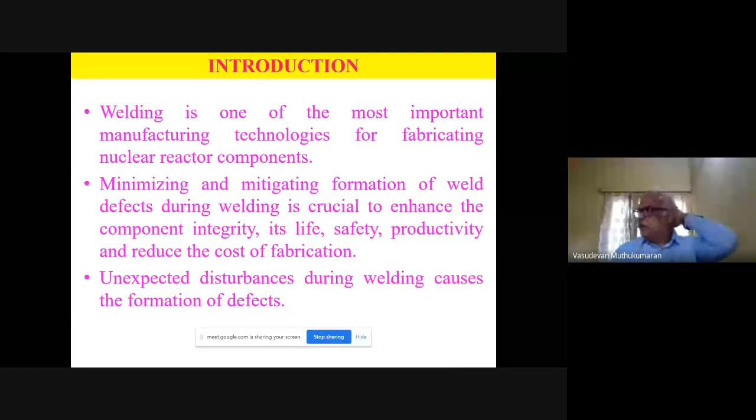In the nuclear field, welding is the most important fabrication process because most of the components in the nuclear industry are fabricated by welding. In the nuclear reactor, the components are very huge and big. Only a few Indian industries are capable of making these components, like L&T and some Walchandnagar industries, and only a few of them we can name. And so it's very difficult, and also a lot of cost is involved in fabricating the nuclear reactor components.

The components fabricated should strictly follow the codes and standards, otherwise you cannot put them into the reactor. So mitigating defects, any distortion, and minimizing residual stresses are very crucial, important factors when fabricating nuclear components by welding. By doing all these things, we can enhance the component integrity, its life, and also safety. Also, we can minimize cost of fabrication and, in turn, increase productivity.

But whatever optimized process parameters you standardize, even after doing mock-ups, when you start fabricating, you end up with defects. This is due to disturbances during welding. It's very difficult to control your welding process, and you always end up with some defects. So here automation plays a critical role. Automating your welding processes can minimize welding defects, reduce post-welding operations, and enhance weld quality.

Based on the degree of automation, we can classify welding processes as mechanized welding, automatic welding, and robotic welding. What is mechanized welding? It is welding in which welding parameters are controlled mechanically or electronically, but manual intervention is allowed during welding. So from manual welding, we moved on to mechanized welding.

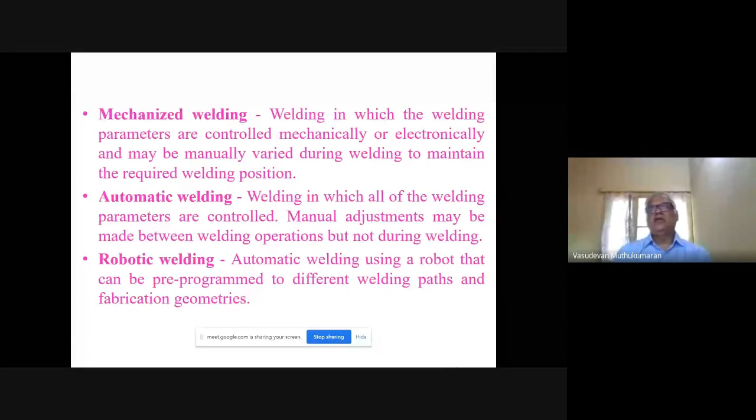This increased productivity, consistent weld quality can be achieved, and we can predict the production rates so that we can have other things in place to minimize cost. A lot of variables can be controlled at a time, and we can get the component fabricated with good quality.

However, there are a lot of limitations also. Automating the welding process requires a lot of capital investment, and we need sensing and controlling devices, accurate part location and orientation, and process planning when you go for robotic or automatic welding. These are the limitations.

Even then, we have a lot of advantages. We can manage the limitations, and still we can benefit a lot by going for robotic or automatic welding in nuclear component fabrication. So we will see one by one.

This is whatever we have done in our laboratory research. I am going to present most of the results from our laboratory research. Of course, towards the end, I will talk about some welding applications at the Nuclear Fuel Complex also.

So we started with the TIG welding system. Around 2001, we were doing only manual welding. Then we wanted to go for the automated TIG welding system. We approached some industry, Prime Automation in Chennai, and got a system which is shown on your screen.

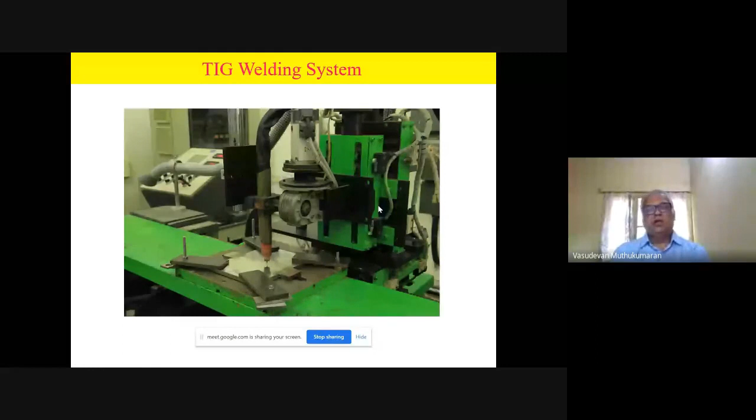Then what we did - one of my colleagues is an electronics engineer who knows machine programming. He discarded this entire controller that you see here, and computerized the entire operation, putting in arc ignition, arc extinction, and we started controlling the power source from the PC.

We then developed this computerized welding system that could carry on a lot of welding. Since 2006, we have been using the system very successfully to develop the A-TIG welding technology for TIG welding of stainless steels and ferritic steels. I will show you some of the results.

We could also integrate an IR camera. You can see here in real time we could capture the full images and process images, and I will be talking about this in the coming slides.

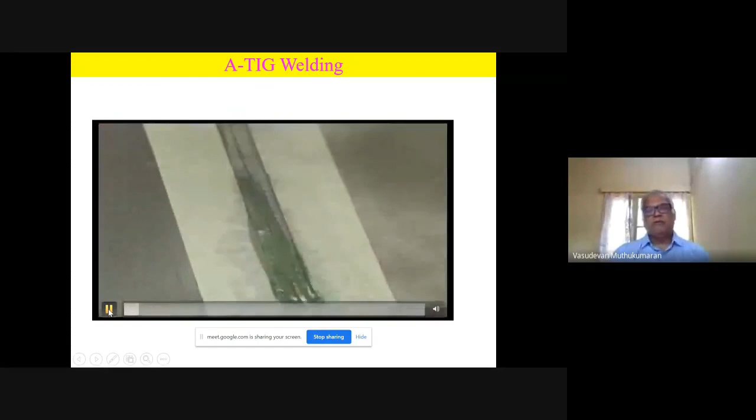So I am going to show you the A-TIG welding technology. I am going to play the video now. Please see the video - here we apply a thin coating of flux on the joint area. It enhances the process performance by multi-fold.

In autogenous welding, we normally cannot get more than 3 mm penetration, but by applying a coating of flux to enhance the penetration, in a single pass we could get 12 mm of penetration in stainless steels. So we can apply single pass and it comes out clean.

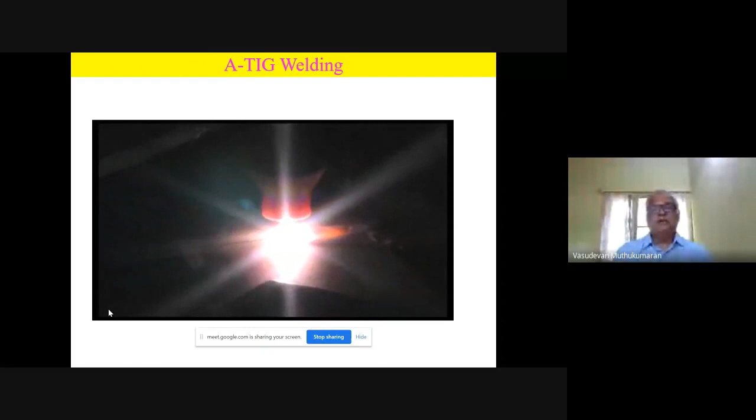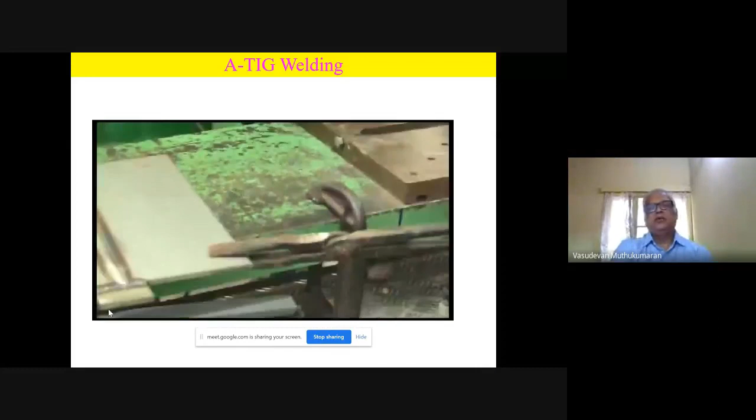Since then we have been using this process for welding various thickness components, even plates. You can see the top side and the back side of the plate here. This pass also achieves radiographic quality.

So in a single pass, we could do large thickness welding. You can see on screen cross sections of 304L and 316L from single pass welding. In comparison, on the right side you can see multi-pass, where we needed some 11 passes, whereas here in single pass we could do 8 mm thick welding.

The bottom one is 12 mm thick 316L. On the right side, multi-pass required 13 passes, which we achieved in a single pass here. The properties are very good, so we were very happy and that's why we got this process approved.

Internationally, TWI has also developed this process. They demonstrated double-sided welding of 20 mm thick material. We tried the same thing here and could also achieve 20 mm using the same system I described. Because of automation and computerization, we could make defect-free welds and achieve 20 mm double-sided welding in stainless steels, on par with international standards.

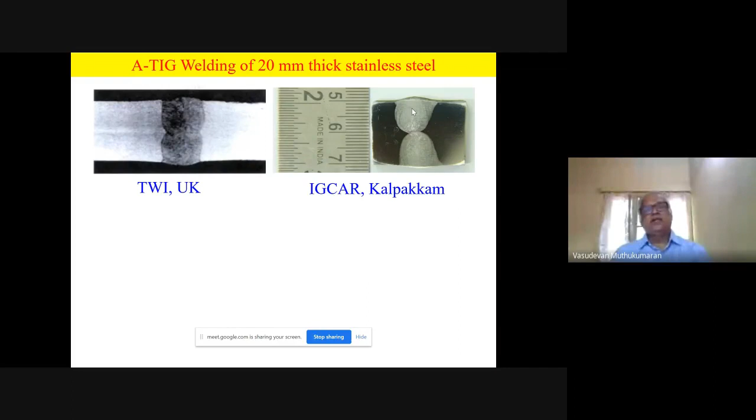Coming to new components - this was in our center workshop. This hexcan component is used as a core sub-assembly. They were welding it by manual TIG before we introduced this A-TIG process, and they had a lot of problems associated with residual stresses and distortion.

We could reduce heat input, reducing residual stresses and distortion. We have successfully fabricated these components and have been using this in our core testing facilities for the last 10 years.

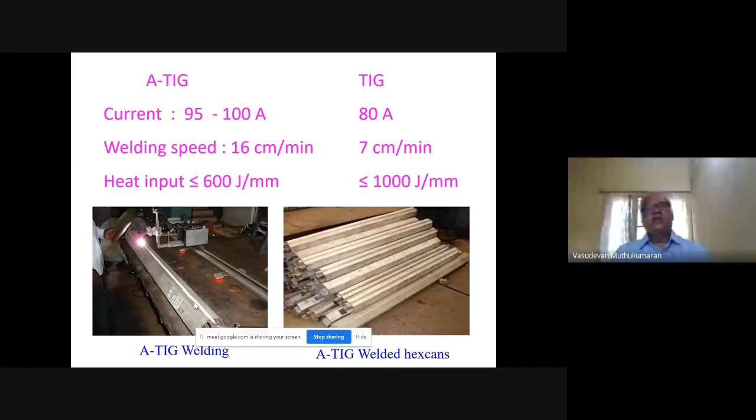Then we went on to do pipe welding. This is again 4 to 5 mm thickness pipe welding. You can see we are seam welding the top side and root side with full penetration. These are the jobs used, and we use a lathe to rotate the pipe. You can see the pipe welding here and the seam on the pipe.

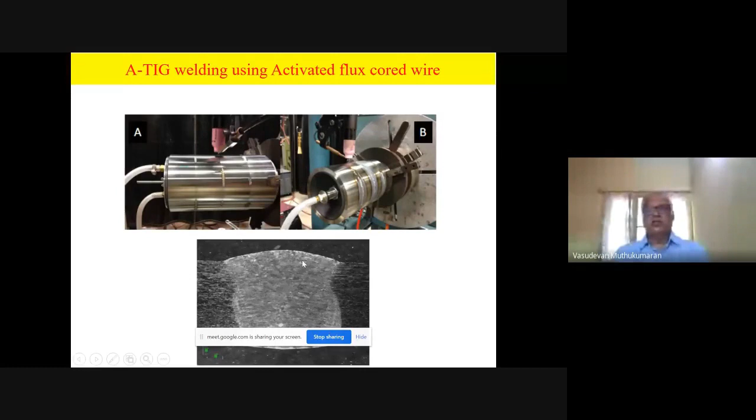So A-TIG welding has been a great success for us in fabricating various components.

Moving on, the next component I'll talk about is the fuel subassembly. This is a core component used inside the fuel subassembly where you pack all the fuel pins. You can see the rods; the fuel pins are located inside, and this outer hexcan is made of D9, another titanium modified stainless steel, while the foot area is made of 316L. So these parts - the hexcan part, center core part, and the bottom foot assembly - have to be welded together.

They use this welding facility in our center, applying TIG welding. Now it's again an automated process, done in the 2G position. You can see here the welding is done, the foot assembly with hexcan, and this requires 2 or 3 passes to finish the welding.

So many fuel subassemblies will be loaded into the reactor - around more than 1,700 numbers are required to start the reactor initially, including fuel, blanket, and reflector subassemblies. So many welding operations are involved in this, which is why we again suggested ATIG welding.

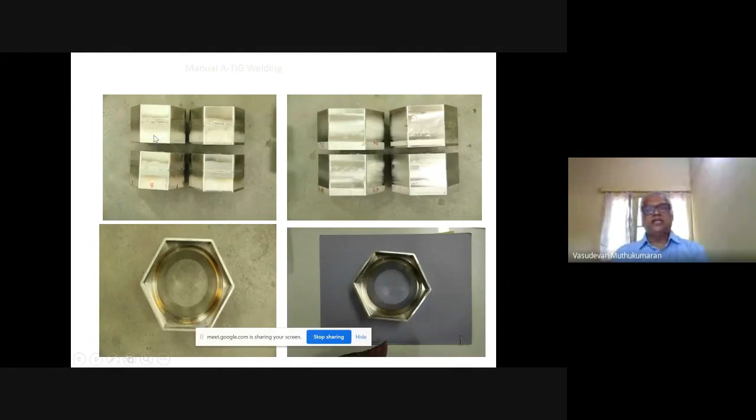On mock-up samples, we demonstrated single pass welding and were successful in reducing heat input and distortion again. It also passed all quality checks. You can see full penetration achieved in a single pass here with ATIG welding.

So the ATIG welding technology developed in the lab has now been transferred to industry. In our central workshop it's used for welding various components, pipes like PFBR fuel subassemblies, pipe welding, various plates, and successfully so. The automation of the process really helped in achieving our requirements.

Moving on to the next one, which is also a variant of the TIG welding process, called narrow gap welding. This is mainly used for welding larger or higher thickness components. The minimum thickness we work with is 25 mm and beyond.

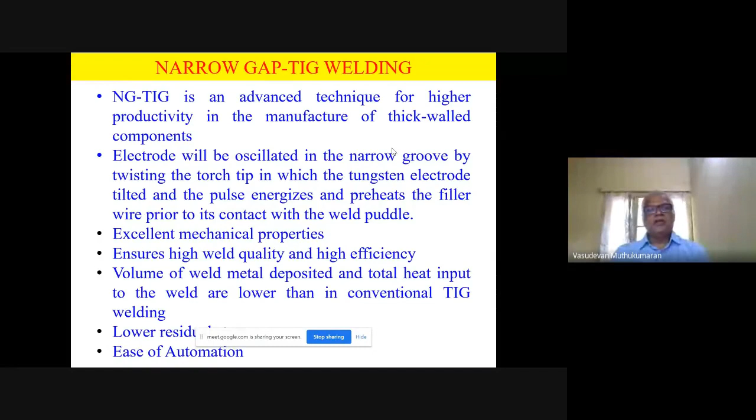This is a fully automated process, and you can see the machine here, housed in our central workshop facility. This is the torch, and we have a small camera here to visualize the welding pass. You can see here a typical narrow gap weld joint cross section.

Down here you can see the conventional V-groove joint. There's a lot of difference - the number of passes required is less, residual distortion is reduced, and the weld metal consumed is less when you shift from conventional V-groove to narrow gap TIG welding.

So we could do this from 40 mm thick to more than 100 mm. Now we are working on an 800 mm diameter component also for AUSC applications, using this narrow gap technology. You can see some of the things we have welded.

You can see here, it's a hot wire based process, because the wire is also heated up just prior to welding. You can see the pipe, 40 mm thick, 304 stainless steel pipe.

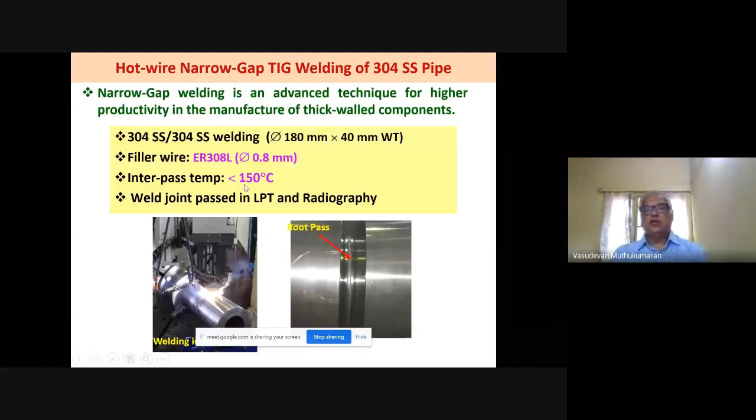Using a 308L filler wire, 0.8 mm dia filler wire was used. We maintain interpass temperature of 140 to 150 degrees centigrade. You can see the root pass done. We have completed the welding. You can see the final pass also here. After completing this pass, we did liquid penetrant testing.

Then 40 mm thick plate also we could weld. So all the pipes and tubes, I mean all wall thickness tubes and plates also, we used it. It's a fully automated process. We were successful in welding various components.

Coming to orbital TIG welding, here we are using this process mainly for AUSC components like 617M and 304H copper boiler tubes. We are using pulse current because there are different quadrants. The torches move through 360 degrees, and we are varying the current from quadrant to quadrant. We adjust the current to get full penetration and a defect-free joint.

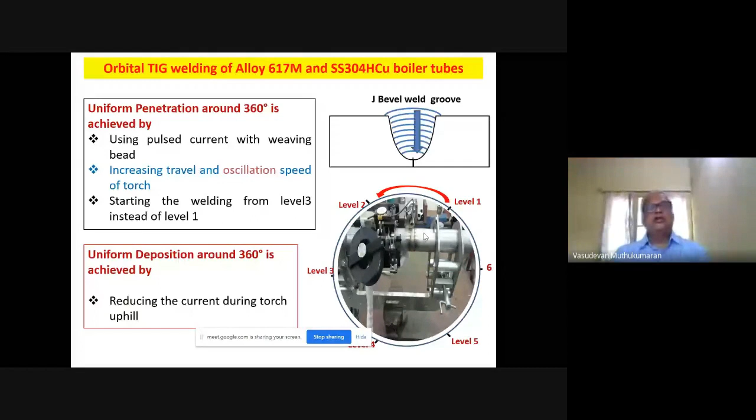You can see here a welded component. We got a root side uniform penetration. Cross section you can see. The wall thickness was 11.9 mm. Tube body was 52 mm. It required around 11 passes. The fabricated tube qualified radiography and liquid penetrant testing. See the cross sections here.

Then again we use the same system for orbital TIG welding of 304L pipes. We are successful in using our orbital TIG welding. Here the torch moves around on the track to weld these. This wall thickness is 6.35 mm, OD is 219 mm, material is 304 stainless steel.

So we could use all this orbital TIG. It's also an automated process. We could control everything and fabricate successfully defect-free components. Only thing is you have to optimize the process parameters, because sector-wise, after you cross the second quadrant going into the third, heat build-up aids the penetration in the third and fourth quadrant. So you have to reduce the current levels when you go to the third and fourth quadrant to get full penetration and avoid melt-through, things like that. So again, we successfully used this process for welding these components.

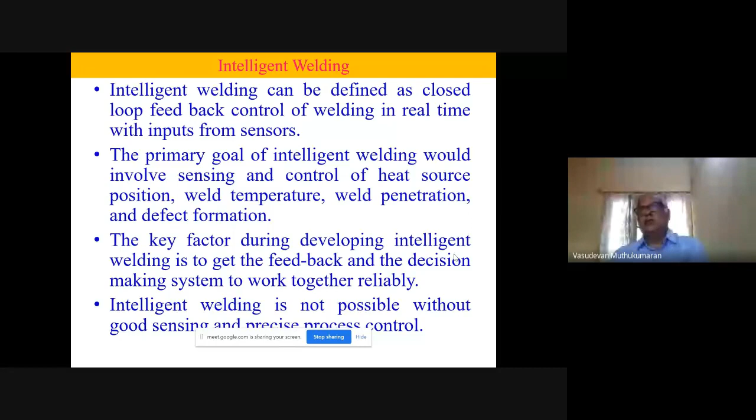Next, we have been working on developing a technology called intelligent welding. We require this mainly because in reactor components, when in service, there are failures in the weld, some defects develop in the weld. We want to carry out repair, because once a reactor is in operation, it has radioactivity and human access is difficult. We have to carry out the repair welding remotely. So we wanted to develop this technology. We started working on it and have made a lot of progress. I'm going to share some of the results.

Intelligent welding is nothing but a closed loop feedback control of welding in real time, employing suitable sensors. We need to sense the torch movement and also control the heat source parameters in real time. We need to control the weld temperature so that we get the required depth of penetration, and the repair welded joint is defect free. So here the main key factor is feedback and decision making working together. The feedback system and the control algorithm have to work together reliably. Without good sensing and precise control, it is not possible, so we have to choose suitable sensors.

We initially tried infrared sensing, an infrared camera, because it measures the temperature during welding. It's basically a thermal imaging method. We thought that should work, but the only problem we faced was the cost and life of the infrared camera. We could still get good results, but now we are moving away from infrared cameras to CMOS cameras, which are cheap and very small in size, and can be used in remote locations.

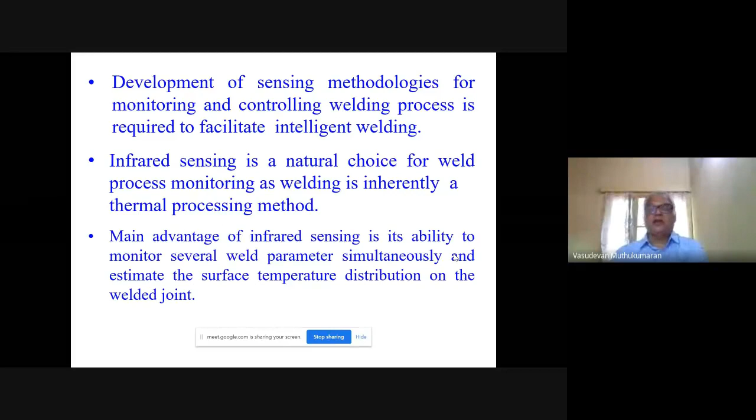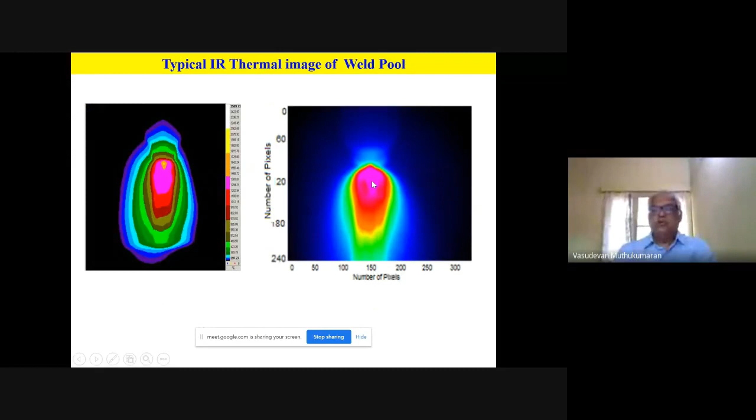You could see these are the typical thermal images we captured. This is after image processing, the typical weld pool image with temperature isotherms. We used feature extraction techniques and image detection techniques to get features like the length and width of the weld pool, and the first derivative from the temperature profile curves to correlate with the depth, weld width, and depth of penetration. For depth of penetration, we use the area under the thermal profile to correlate with the depth of penetration.

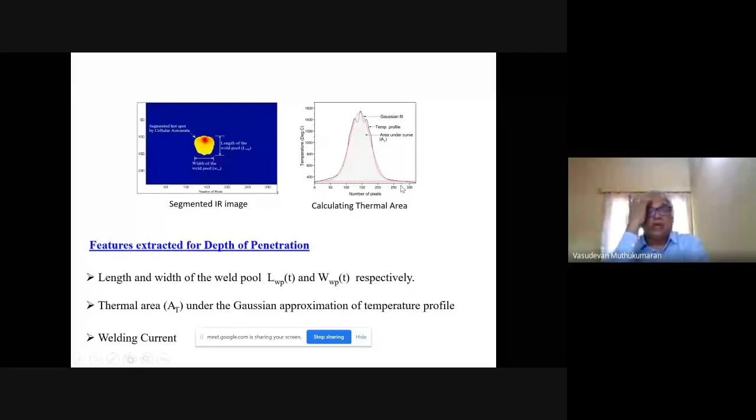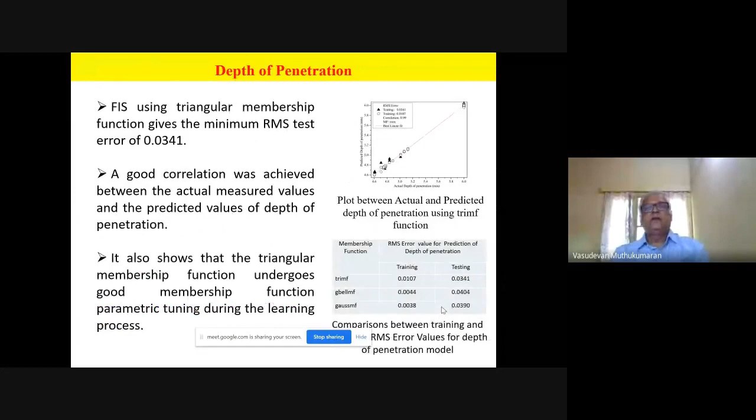RMS values of very low value could be achieved for predicting depth of penetration as well as weld width. So the intelligent welding strategy we propose to adopt is to use a non-contact sensor. It can be a CCD camera, CMOS camera, or a combination of a DIC camera and IR camera for monitoring the weld. Then we need to develop knowledge base on signatures of weld defects.

I will show you some of the signatures we captured using an IR camera. Temperature field can be measured and correlated with weld defects and weld dimensions. Using a DIC camera, we can use strain measurement correlated with residual stress, distortion, or cracks like defects. The weld surface profile captured with this camera can be correlated with bead shape and penetration. So first we have to develop a database, a knowledge base on the various defects and weld dimensions correlated with image profiles.

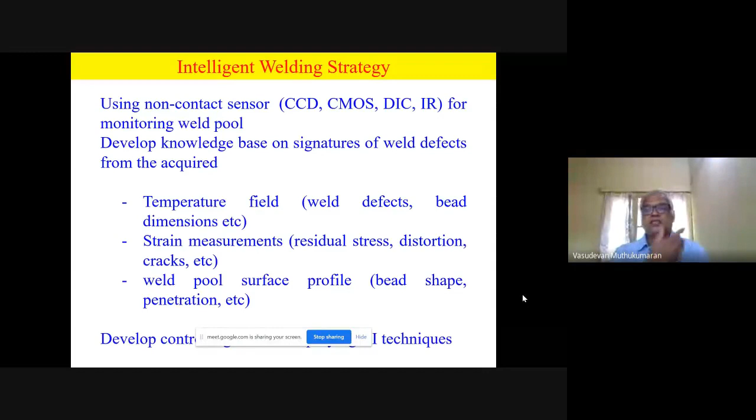We can see some of the image signatures captured using the IR camera. You can see this entire weld length, where we measured the temperature. We can see that it's almost flat, which shows a complete penetration. This is the backside. When you get a complete penetration, there is no change in the temperature.

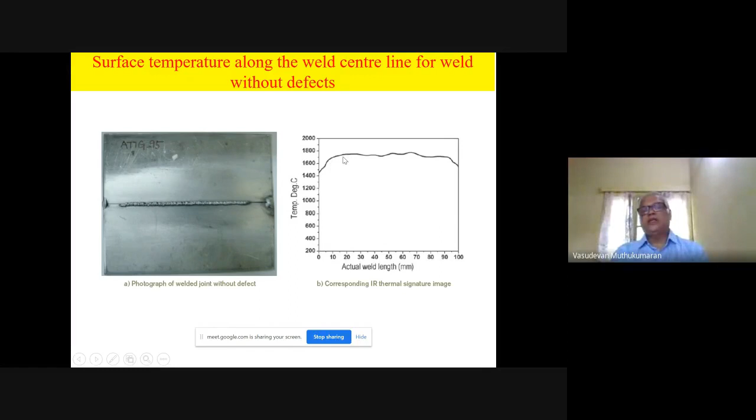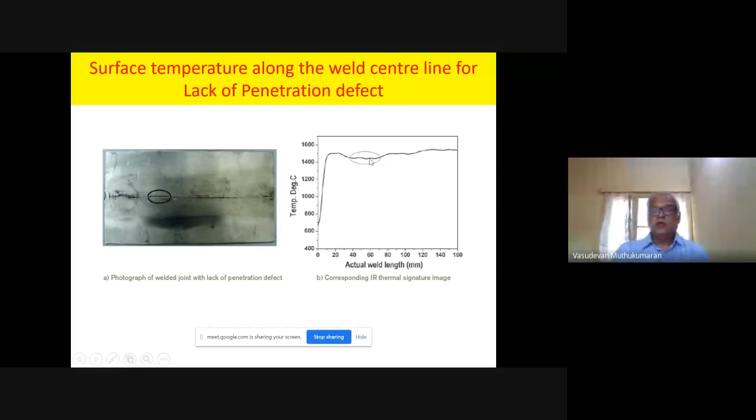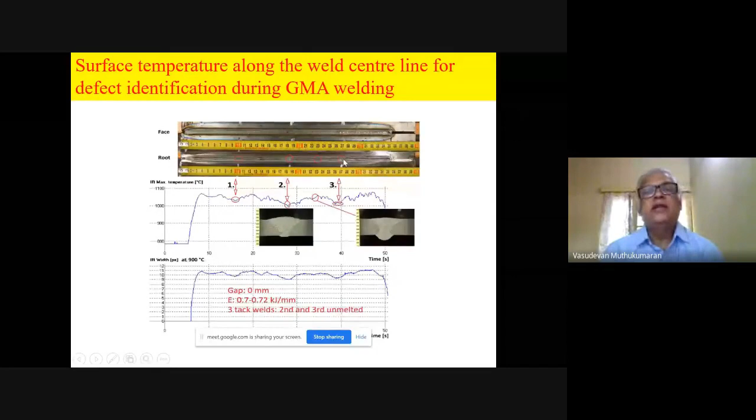So these are the strategies we would like to adopt during intelligent welding. Here in GMA welding you can see again the temperature is recorded. There are some dips in temperature associated with defects like lack of fusion, lack of penetration, and so on. This is in GMA welding, again highlighting the defects.

You can see the defects marked in the weld sample, and correspondingly in the temperature curve you can see various defects. So these are the things we record. We use the surface profile, which can be captured using any vision camera, for calculating the depth of penetration.

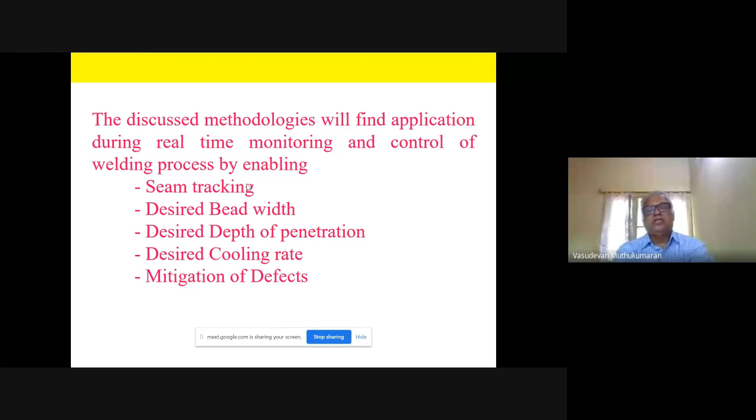What we want to do using this intelligent welding strategy is adopt it in real time for monitoring and control of the welding process, mainly the TIG welding process. This can be extended to laser welding as well, enabling seam tracking to achieve the desired bead width, desired depth of penetration, desired cooling rate, and to mitigate defects in the weld.

So this is the strategy we want to adopt for developing remote welding technology for our reactor components, and we are almost there now.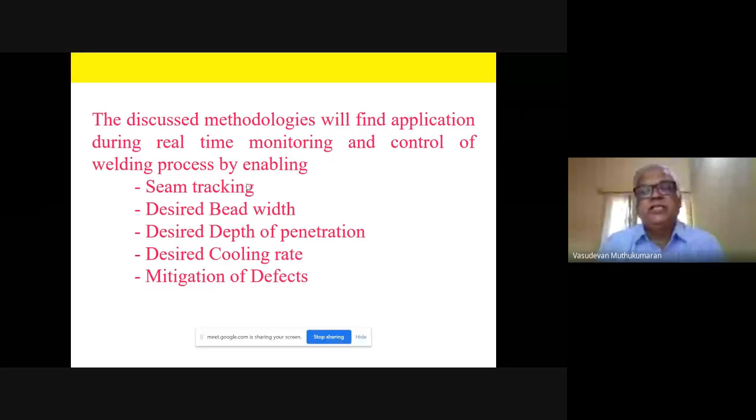Hello? Hello? Sir, what's the problem?

You can see here, this is the hot wire feed here, this is the TIG torch, the CMOS camera is positioned, and the laser seam tracker. We could use these technologies, as you can see in a close-up look, the CMOS camera and then the seam tracker.

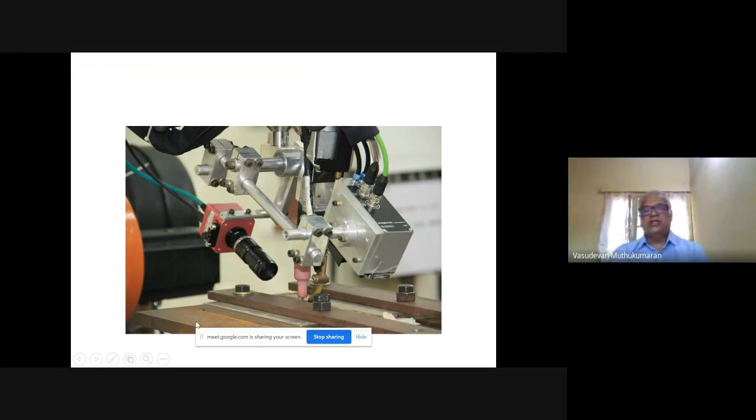This is the joint ready for welding, the clamp, and this is the positioner table. You can see here welded plates. Using only the positioner, you can see carbon steel plates of this much dimension, 560 by 300 by 12 millimeters thick.

This is our top side, and this is the back side. We passed radiography. We could successfully weld because it is an automated process with seam tracking and everything pre-programmed. We could do it very fast, defect free, and we could do it at 2G position, 3G position, and 4G position as well.

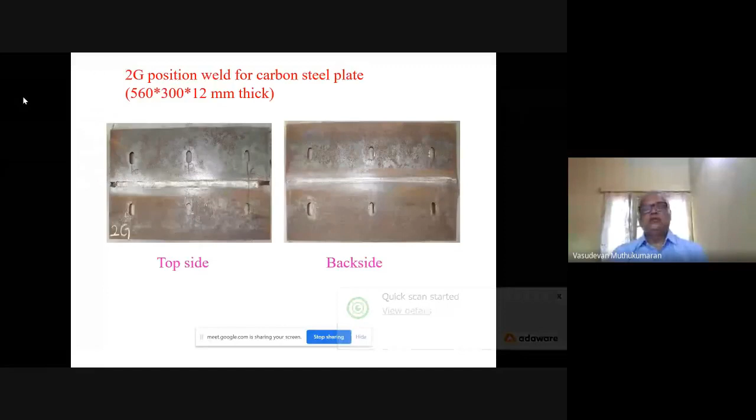All we could do successfully, defect free, not only on carbon steel, but also on stainless steel. This is an 11mm thick plate. You can see the top side, root side, and the cross section. It required some 9 passes to complete the joint, and we could successfully pass radiography again. So we could use the robotic automatic welding system to get good quality weld joints. Now we are evaluating their mechanical properties, residual stresses, and things like that.

The system we are finding very useful. Now with the same robotic welding system we are also using for pipe welding. Pipe welding also can be used, but I don't have any slide here, so I cannot show that.

Main purpose here is we want to use this system to investigate remote monitoring of the TIG welding process, comparing our systems with what is available at Oak Ridge National Lab USA and TWI UK.

Whereas in our case, you can see the camera we have is only 60 dB dynamic range of brightness. With the arc, the arc effect is still seen in the images during TIG welding and even multipass welding - you can see the grooves. So what is the camera we have? It's a 60 dB dynamic range of brightness. We need to use 120 dB cameras to nullify the arc effect.

Then only will the arc be totally not seen, and we can precisely use the weld pool for image processing and further development of control algorithms to control depth of penetration and bead width. The same technology can be extended to additive manufacturing as well. In additive manufacturing, you need to control the bead width and bead height. We can use similar cameras for that, extending this to processes like wire arc additive manufacturing.

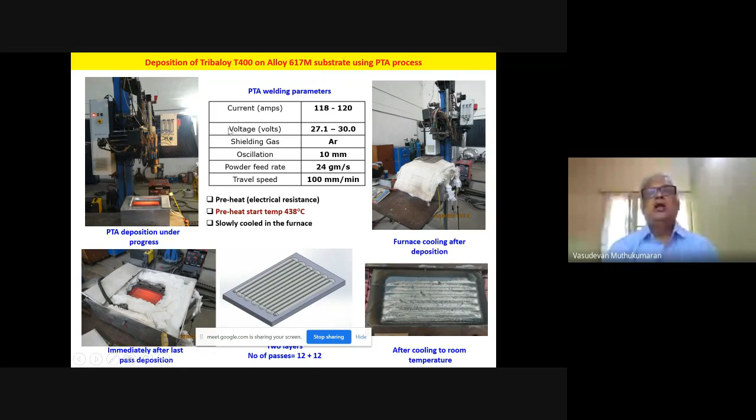We are developing technologies for that. You can see it's a PTAW process in our central workshop - this machine is the plasma transferred arc welding process, where overlaying is being done. Here the material, Tribaloy T400, is deposited on alloy 617. These are the parameters used. It needs to be preheated by electrical resistance and then slowly cooled in the furnace - you can see it's furnace cooling after deposition. You can see the deposited substrate, and this is the hardfacing coating.

We could successfully demonstrate that. This is how the plasma transferred arc process works. This is your tungsten electrode, and you can see the inner nozzle and outer nozzle. The outer nozzle has shielding gas, the inner nozzle has plasma gas, and powder is also fed through this. Through the nozzle, when the arc comes, it gets constricted - that's how it gets a penetrating power arc, and the process performance is enhanced.

You can see the hardfacing deposit laid on the substrate material here. This is the process principle.

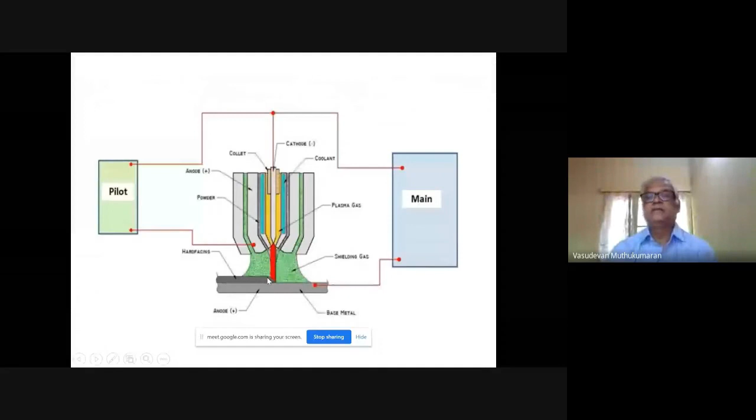We could do this again for PFBR applications. The diverse safety rods use a dashpot piston that requires hardfacing. The material is modified 9Cr-1Mo steel, and we use a nickel-based hardfacing alloy - commercial Deloro 50 - for depositing on this modified 9Cr-1Mo.

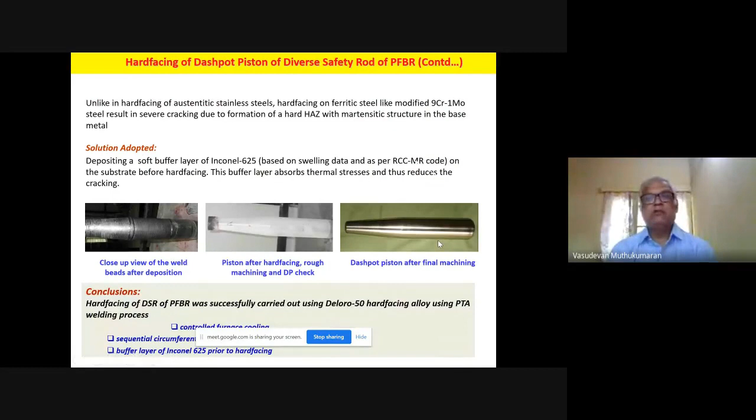We could successfully develop the technology. You can see here, this is after hardfacing, and this is dye penetrant testing after machining. So we could successfully develop the technology for hardfacing of this diverse safety rod of PFBR. It is now used in PFBR. So this is about PTAW.

Again, because of automation, we could achieve this. Before automation, we worked with OnePlus Systems in Chennai to develop this technology. Initially, even for sleeves in the grid plate, they helped us through automation. If we tried with manual methods, we used to get a lot of defects. After automation, we could make almost defect-free hardface deposits. So automation really helped in achieving our quality.

Coming to the next one - for hardfacing, so far we have been using the PTAW process. Now we want to try a low heating process called CMT, a process developed by Fronius.

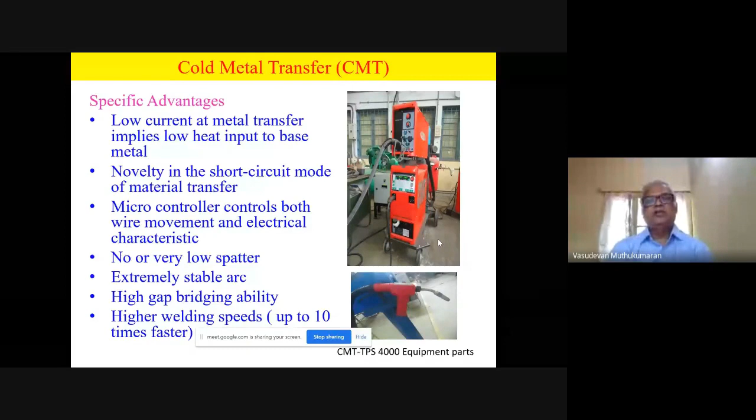This is a low heating process, let's see how it works. You can see this is a mechanism, and here's what happens during this process.

During MIG welding, an arc is struck between the filler wire and the material. Once the arc is initiated, the filler wire is moved to touch the weld pool. When the wire touches the weld pool, the arc is extinguished and the current is reduced simultaneously. Then the wire is withdrawn, and the weld droplet detaches from the filler wire and falls onto the workpiece to be joined. Then the arc is reinitiated.

There is a hot and cold period alternating. It happens very fast, so productivity is not lost, and we get a low heat input, allowing us to avoid spatter. This is useful for hard facing and cladding applications.

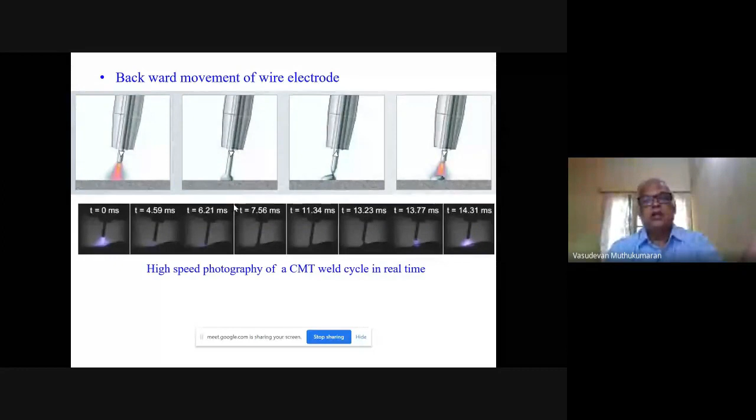We successfully deposited, and now we are characterizing all the deposited layers. Since this is a robotic process, we could control all the parameters, and we are able to get defect-free hard face deposits.

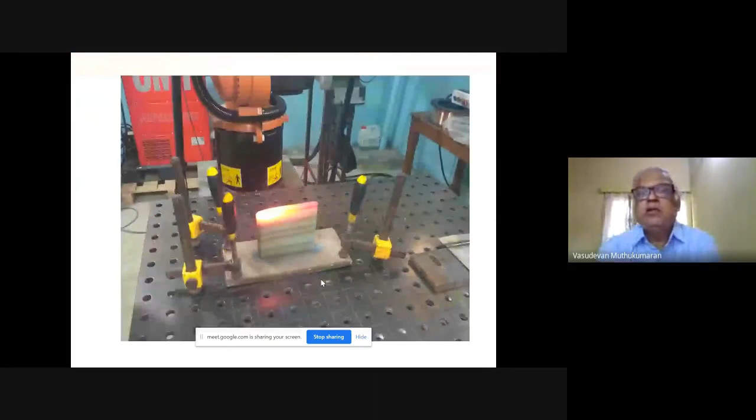Moving on to laser welding - especially we use laser welding for end-cap welding. In end-cap welding, there is a fuel element inside loaded with uranium oxide pellets. Then on the sides of the tube, we need to weld plugs.

Earlier we were using TIG welding, but we have now moved on to pulse laser welding. You can see in the lab we developed this technology - this is a CNC controlled laser welding system. You can see the controller, and this is the laser welding system.

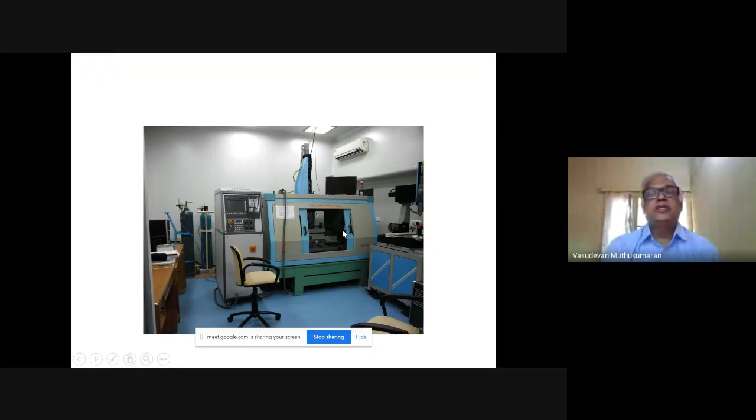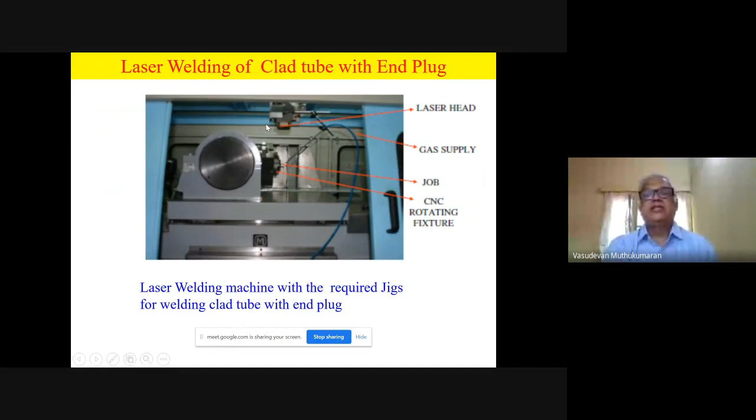This is pulsed laser welding with peak power control. You can see the actual welding - the component, the tube, is held here in a rotating chuck. This is the laser gun, and you can see the inside views shown here.

We could successfully weld - you can see P91 tubes can also be welded, as well as clad tubes. These are the joints welded - this is a clad tube and this is the end plug, successfully welded. You can see the welded clad tubes here, and this is the waveform of the current.

These are the parameters we used and measured. You can see the penetration is complete with a good weld profile. So we successfully optimized the process parameters for end-plug welding of fuel pins, for both stainless steel and modified 9Cr-1Mo steel.

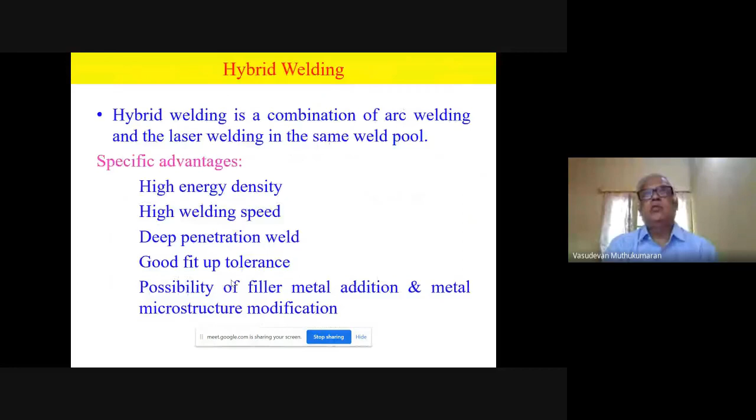Then, since the pulse laser system penetration is limited to only 500 watts, we integrated a TIG torch. We specially designed fixtures to attach and integrate the TIG torch with the laser gun, and we were successful. When you couple a TIG torch with the laser welding system, there is significant improvement in depth of penetration at higher speed.

We can also still avoid defects associated with the laser welding process, because we are combining two heat sources - laser and arc welding. Defects like porosity can be avoided, penetration can be increased, and defect-free joints can be fabricated.

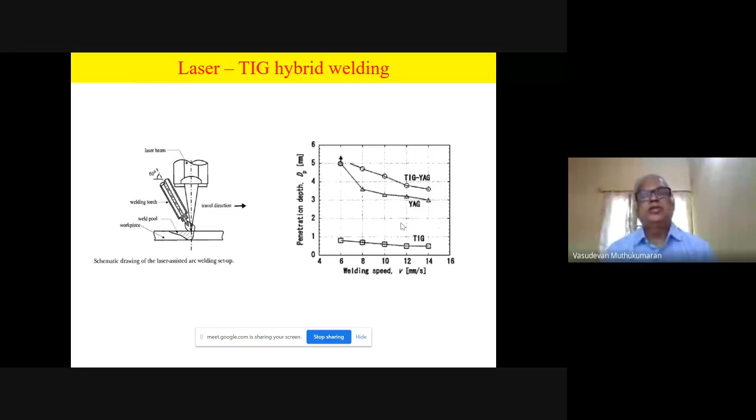Here you can see the TIG torch positioned at an angle, integrated with the laser gun. These are the parameters we used. Here's a closer look - this is our 6 mm thick stainless steel plate, 300 mm long.

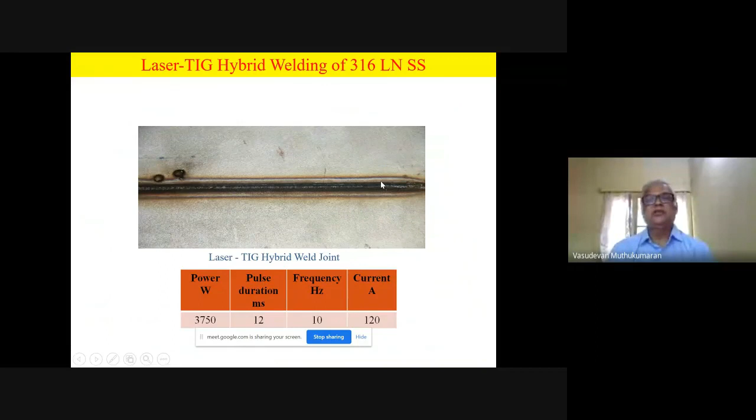We are doing butt joints, square butt joints - you can see the positions. We successfully welded again using the parameters given: pulse power, pulse duration, frequency, and current, which we optimized to get a defect-free joint. You can see the weld cross section showing full penetration.

This we developed in our laboratory. This technology again.

To fabricate joints and then modify them for the mechanical properties, residual stresses, and distortion, we could also run FEM simulation—not the scope of my lecture—and correlate with the residual stresses. This is the system in our lab.

Then we wanted to try laser MIG welding. Here again, the MIG torch is integrated with the laser beam. Since we don't have the facility, we approached ARCI for our welding requirements. My students went and did the work. You can see here the system available.

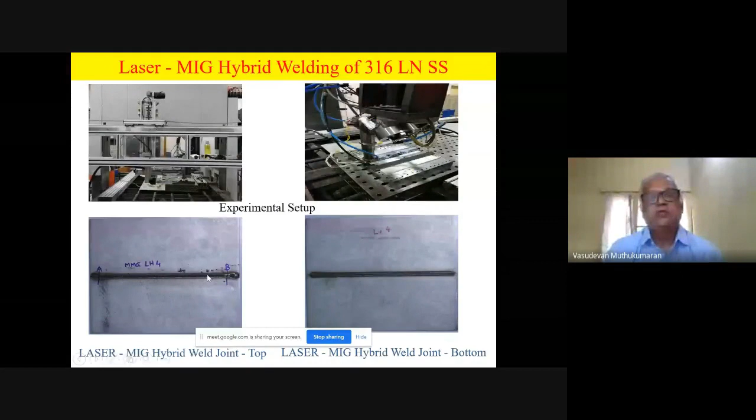At ARCI, we could weld. You can see the top side—successfully we could weld using laser MIG welding. These are the parameters; if we control them, we can vary the weld attributes like penetration, deposition, and other things. There are many parameters involved in laser MIG welding, and you have to play with them to get the desired weld attributes.

You can see the cross section again, with the triple cap reinforcement on the top narrowing down to the root. The microstructure also develops as expected. Because we use a filler metal here, we could get the desired ferrite number—no porosity, no hot cracking, nothing is there throughout.

So this is how we are using the advanced welding processes, which are also automated—some integrated with robots, like hot wire TIG welding, laser welding, and laser MIG, for welding of our nuclear structural materials, successfully.

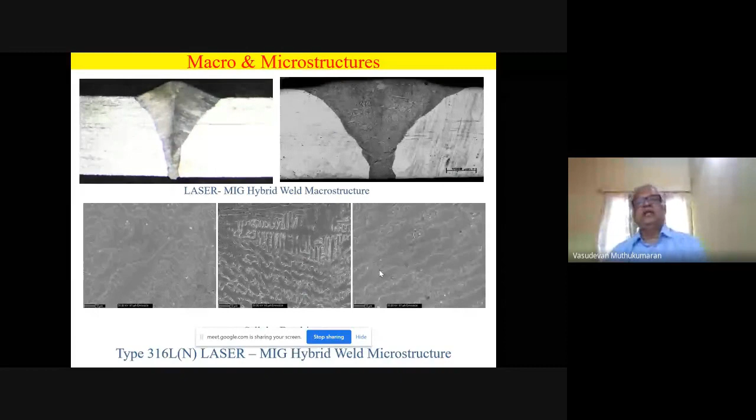Then moving to the next one, we move on to magnetic pulse welding. This is a good process, invented long back. We are trying to use this process for our end cap welding. The principle involved is explained in this diagram.

In this slide, you can see the current-carrying coil, and here is your workpiece located—outer tube and inner tube. When current is passed in a short time through the coil, a magnetic field is induced, and eddy current is also introduced in the outer tube, generating an opposing magnetic field. The two opposing magnetic fields between the coil and the outer tube repel each other, accelerating the outer tube to impact the inner tube. Because the impact velocity is very huge, plastic deformation forms the bond.

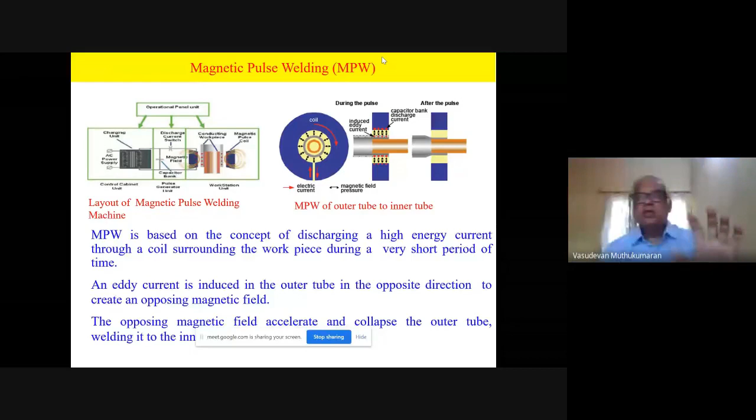This we are using for this clad tube, and this piece is an end plug. We are able to weld successfully using this technology. This is a machine we developed at BARC Mumbai—the entire system is developed and controlled at Bhabha Atomic Research Centre, Mumbai. The technology is licensed, and ECIL is now selling these machines.

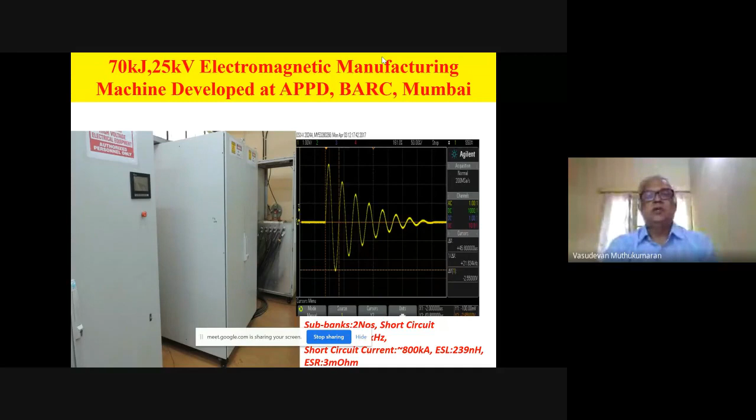You can see the parameters given—capacity of the systems, the coil arrangement, and things like that. Here only the coil life is important; that's the main thing you should take care of.

Here we have done D9 austenitic stainless steel to T91 end plug welding. You can see the welded joints—we optimized the process parameters. You can see the bonding at the interface; it's wavy welds, similar to explosive welding, because of the high impact.

Due to high impact, the bonding takes place by plastic deformation. You can see the wavy interface—there is no melting involved. So we could successfully optimize and fabricate the joint.

We want to use this technology for future welding as well. Again, for ODS steels, we could also weld using this technology—9Cr ODS with the T91 ferritic end plugs, we could weld successfully. You can see the bonding cross sections; at about 5 mm length, we could get good bonding.

We use copper mainly as a driver to generate the opposing magnetic field so that the impact velocity is huge. We also have to suitably design the end plug geometry so that the contact angle and other parameters are optimized to achieve a good bond.

The parameters we use are given in the table: capacitance, voltage, and energy or heat input. You can see the time period is the main variable—this is the current used. This is the end plug geometry, which needs to be optimized to get a good bond.

You can see the microstructure—here, a beautiful wavy structure. Because we also did TEM analysis, there was no melting involved at the interface. We could get a successful joint.

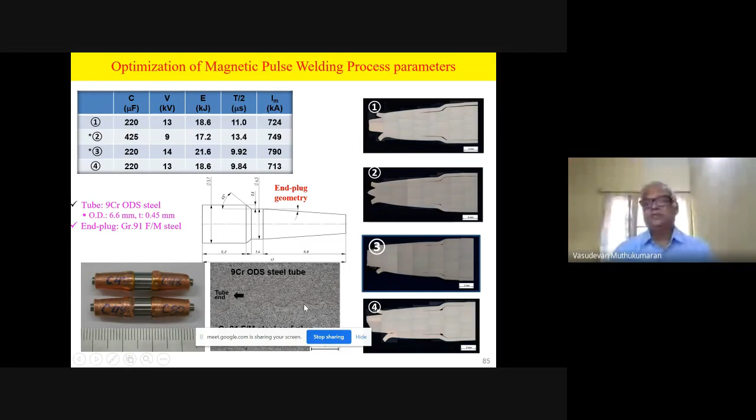Again, this is P91 to P91 end plug welding. You can see the bonding at the interface.

The wavy nature of the interface is seen here again in the D9 fuel pin to 316L end plug. You can see this cross section of the end plug. This is the end plug, this is a clad tube, and you can see the wavy interface.

So we could successfully optimize the process parameters. The machine is available in BARC, and we went and did welding there. I also used some systems in Korea for ODS steel welding, and Bangalore also has private companies with this machine and technology.

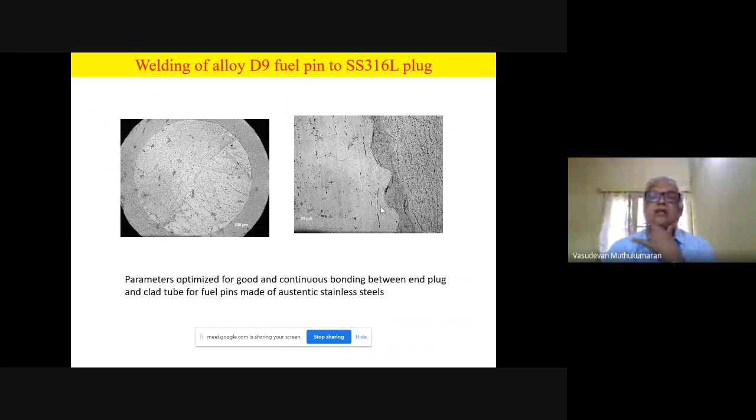So these are all about magnetic pulse welding.

So we have discussed so far, starting with conventional TIG welding, moved on to computerized TIG welding, developed TIG welding technology, and then talked about narrow gap welding applications for nuclear component fabrication. Then we talked about orbital TIG welding, then moved on to intelligent welding, hot wire TIG welding, and further on to laser welding, hybrid laser welding, hybrid MIG welding, hybrid laser TIG, laser MIG, then magnetic pulse welding. This is all about the research going on in our laboratory, the materials joining laboratory at Kalpakkam.

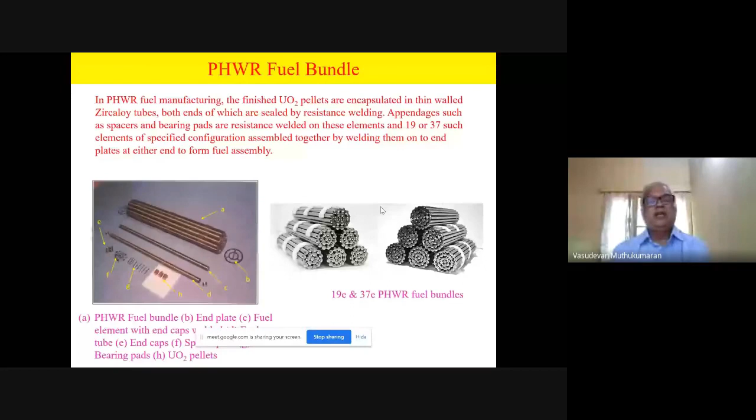Now I want to speak on some other things going on at Nuclear Fuel Complex in Hyderabad. They are making fuels and fuel bundles for PHWR. This is already established technology. They fabricate fuel bundles using UO2 pellets encapsulated in Zircaloy tubes, which are then welded with end caps using the resistance welding process.

You can see here fabricated fuel bundles. Here you can see 19 element fuel bundles used in the 200 megawatt, 220 megawatt electric reactors. Now for 500 and 700 we are using 37 fuel element bundles, shown on the right side.

So NFC developed all these technologies in-house. They designed the machines, and with vendors they developed the machines successfully.

You can see this end plate, which holds the fuel pins together. It is welded by robotic resistance welding, which we will see later.

This is your clad tube, the Zircaloy clad tube. You can see the end plugs and the UO2 pellets here, which are loaded inside, and then the end plugs are welded.

Here are some appendages on each pin. You can see these appendages, which mainly give space between fuel pins, because the coolant has to flow through the fuel pins and extract the heat generated due to fission. Here they use heavy water, which gets heated up, and in the second circuit that heavy water heats the water for producing steam.

That's how this plant works.

You can see here projection resistance welding using inert gas shielding for welding appendages, spacer pads, and bearing pads onto the fuel tubes on the outside. This is well established for PHWRs, customized and extensively used day to day. These machines are designed and developed by Nuclear Fuel Complex Hyderabad.

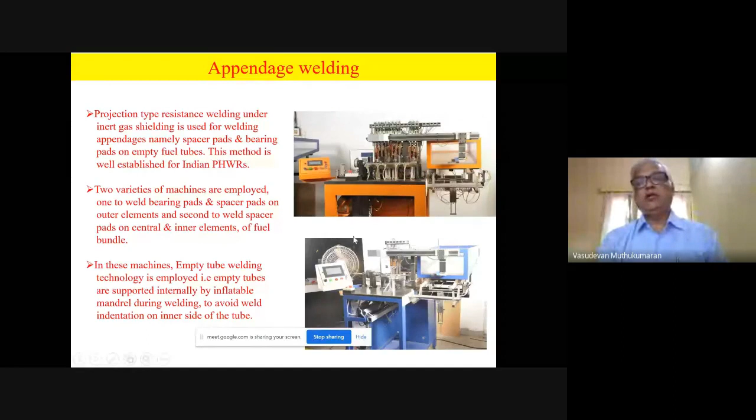Again, coming to end plug welding, the resistance upset welding process is used. Again, you have to control the current, time, and force involved to get the quality.

Because the fuel pins are the primary containment holding the fuel, fuel pin failure is not at all accepted in the reactor, since there should not be any radioactive leakage from fuel pins. If any fuel pin failure occurs, we immediately have to stop and see what is happening and fix it. This is the first barrier to release of radioactive material, so the fuel pin quality and weld quality should be very good.

So they have successfully established all the technology, and we are generating power in PHWRs successfully over the years in India.

The last one is robotic end plate welding, where the fuel pins are held together. You can see that here. At both ends we use a circular disc sort of thing that is welded using a robot, with a projection type resistance welding process. Everything is automated, so every day they are making so many fuel bundles for our power reactor requirements. This is being done at NFC, Hyderabad.

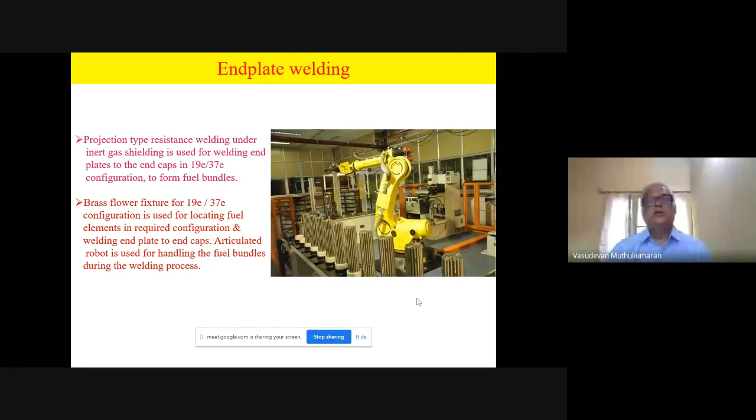Now coming to the latest advancements, what's happening in reactor vessel fabrication? A lot of advancements are happening in foreign countries, and we also want to adopt them.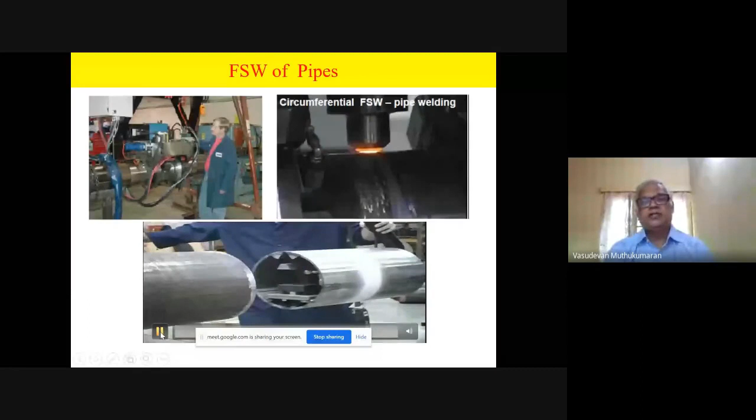Now, pipe welding using friction stir welding. In the US, they have successfully demonstrated this process for carbon steel pipe welding. I'm going to play the video so you can appreciate how this works. This is a fully automated system, welding a 6 mm thick pipe, successfully demonstrated using the friction stir welding process.

This is done in the US. Of course, we also want to do this in future for stainless steel pipe welding. You can see the video live now.

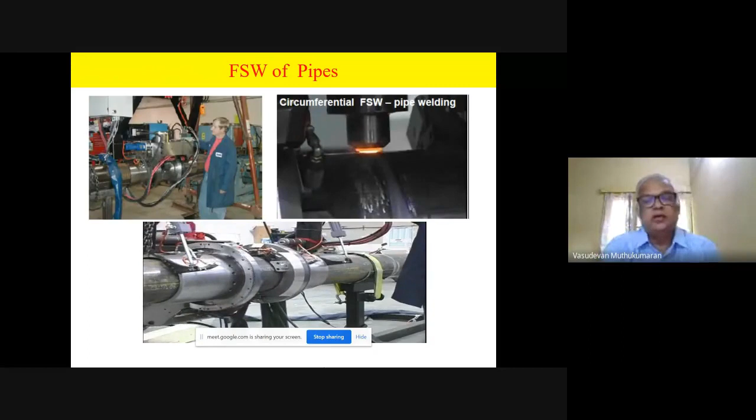They use tracks for the movement of the friction stir welding tool. You can see this track here, and the welding being carried out in an orbital fashion - it's orbital friction stir welding. This is mainly for pipe welding, even for cross-country pipelines.

To avoid a hole at the end, they use an extra piece to stop the process so that the hole at the end is avoided. You can see them fixing the extra piece at the end - welding will be completed on the extra piece, not in the pipe itself, so the hole at the end is avoided. You can see that extra piece fixed there.

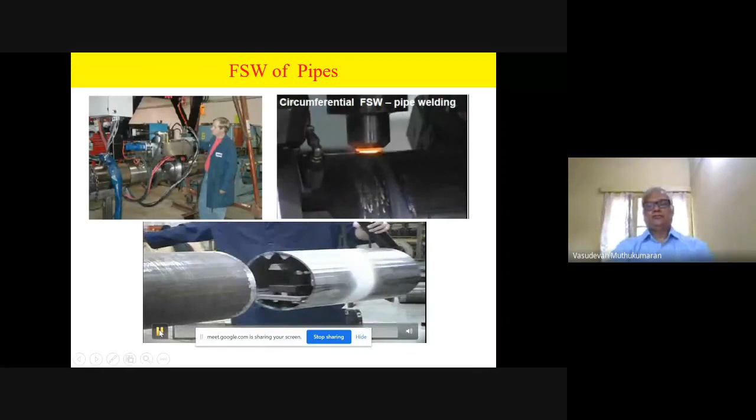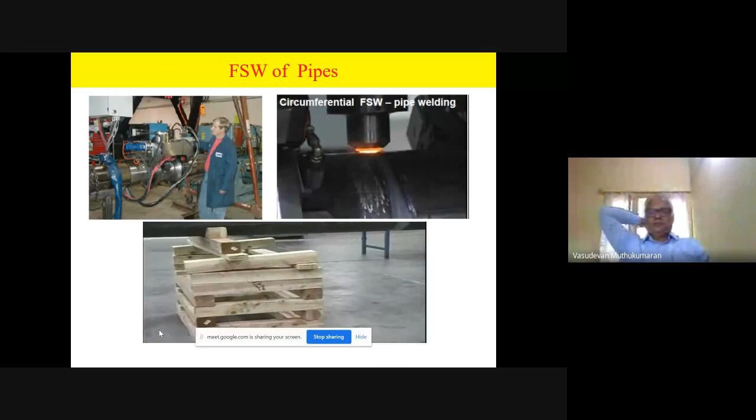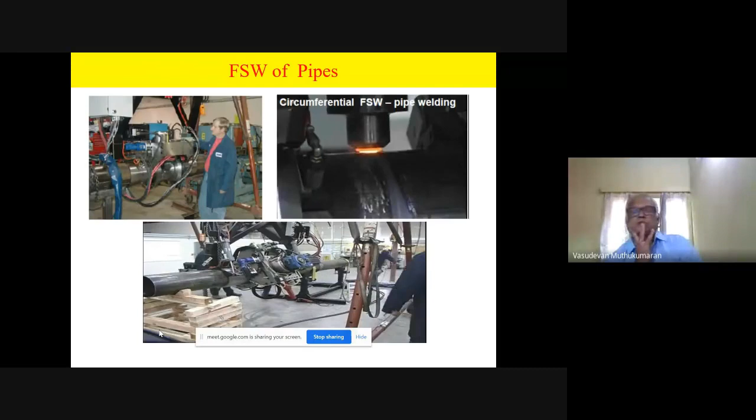I'm playing the video again. Inside and all, they use support at the welding joint area.

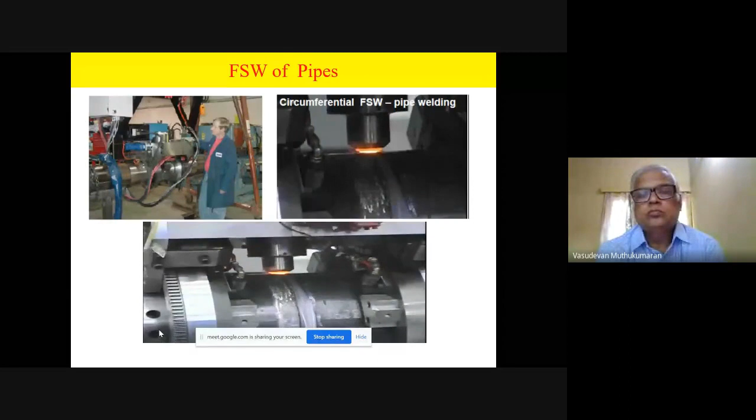He is keeping the extra piece of material to finish the process, so that no hole is found at the end of friction welding.

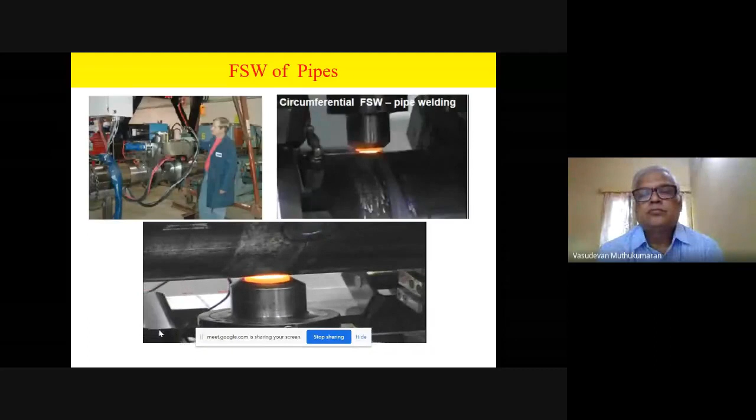In a reactor, we have stainless steel pipes of very long lengths, and a lot of welding is involved. In future we may adopt this process. As of now, we are using the orbital TIG welding process, but we may move to this in future so that a still longer life would be achieved.

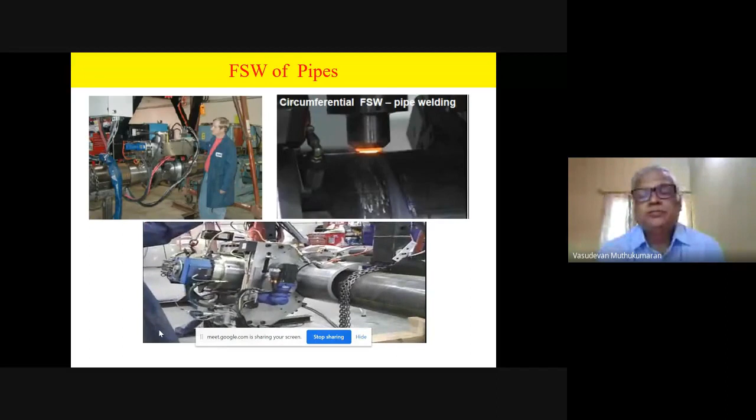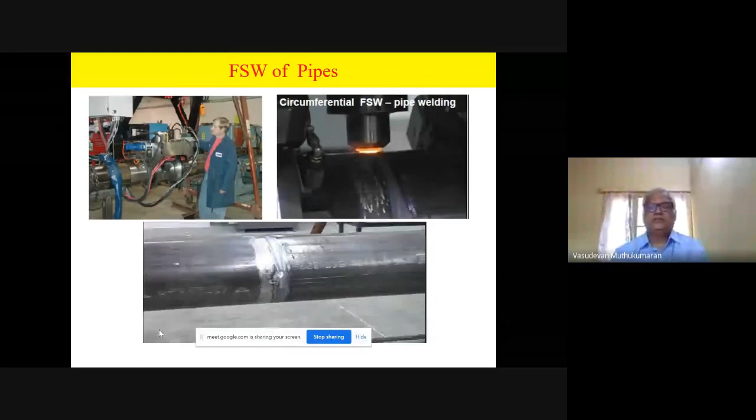This is stainless steel pipe, and the welding is over now. We will remove that extra piece, then the joint is complete. You can see the hole on the extra piece, which we will cut and remove. Nicely done, the job is done nicely - pipe welding is over. It's a solid state welding process, without filler metal, fully automated, and can be used for welding cross-country pipelines.

So coming to the summary, welding automation uses robots to increase the performance of weld production. Automated welding increases speed, precision, and quality, and minimizes chances of errors or weld defects compared to manual welding. The robots are very precise, moving smoothly at considerable speed along a pre-programmed path. Being computer-based, they can be programmed with sensors and control algorithms to follow the seam and apply corrections in real time to produce defect-free joints. High quality precision welding is guaranteed, and defect-free welded components are manufactured in large quantities through robotic and automated welding.

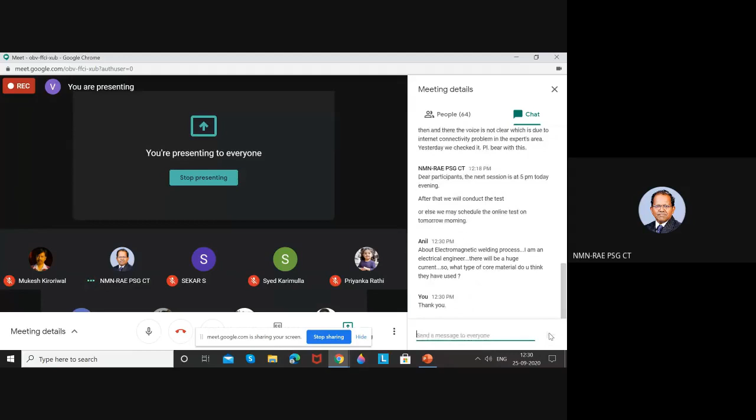Sir, Vasudevan sir, we have some questions in the chat box, sir.

Yeah, about electromagnetic - I am an electrical engineer. There will be huge current, so what type of core material do you think they use? Copper-based coils only?

Copper-based coils, but the coil life is important actually, because coil failures often happen. That is a major issue with the system. Have I answered the question?

Yes, sir. Thank you.

Sir, one more question is there - which will be wound on what type of core?

These things only the people involved in developing the system would know. I am not directly involved, so maybe only they can answer your question. I don't know exactly what they do.